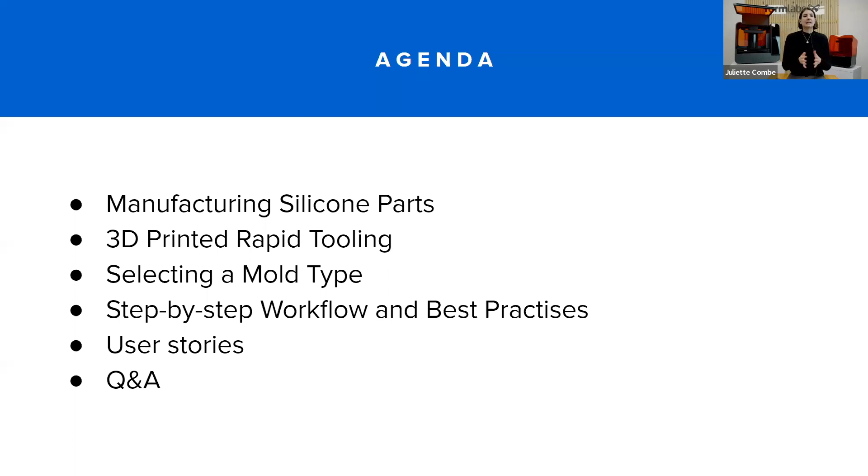Just to give a little context. So silicones are a class of polymers that contain the elements silicon and oxygen, and they transform from a gel or a liquid to a highly flexible and stretchable solid after what we could call a curing process. So they are very popular materials because they are very versatile. They have high performance properties.

Many of them actually. So first, they allow soft ergonomic geometry, but they also have very good heat resistance, electrical insulation, chemical stability, high tear strength as well, and watertight seals and so on. So they are very popular across many industries, from automotive to construction, electronics, consumer goods. So you can see those pictures on these slides. In the healthcare market also.

If you want to share what industry you are from, feel free to discuss that in the chat. Would be very curious to know what industries you are in.

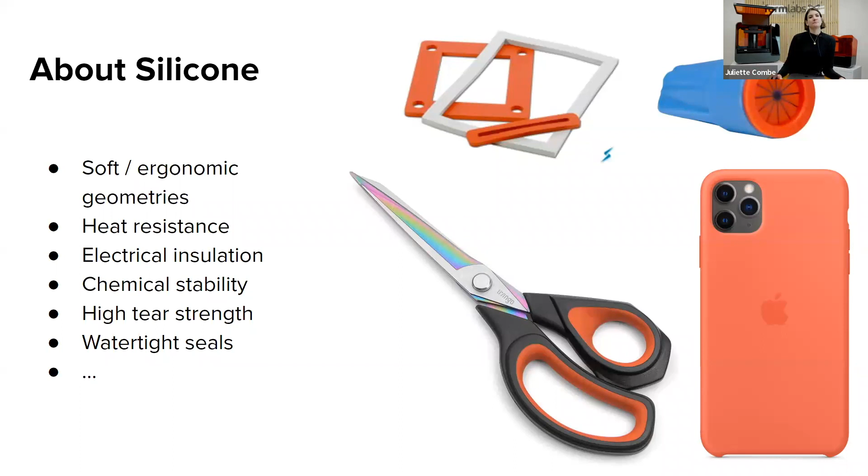And also in the entertainment industry, this is a pretty popular material as well. So just a quick slide on the Durometer scale. That is a standard for showing the different hardness of silicone. So we're going to talk about a few different silicones here. You can see it ranges from very soft material to very hard material, from soft molds to harder parts.

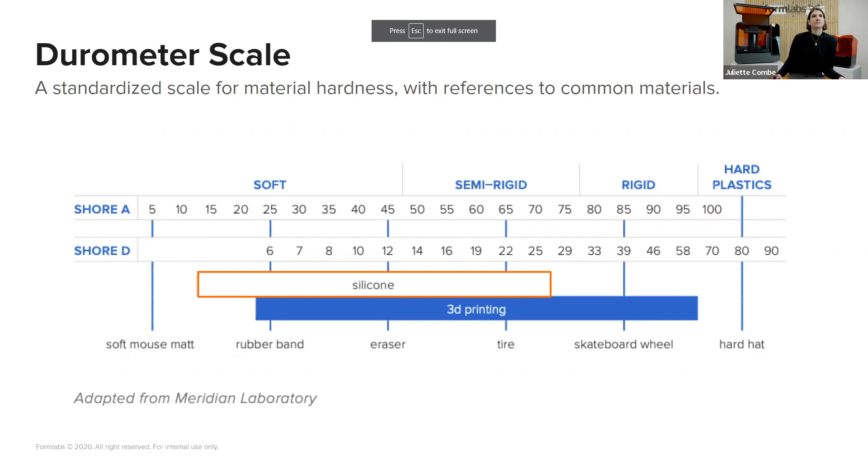So silicone elastomers dominate the market. This is what we are considering today. This is our focus, and they can be divided into three categories. First, liquid silicone rubbers, also called LSR. Those are high performance silicones, and they are usually employed for producing technical parts with very tight tolerances, and they are processed at high temperature with what we call liquid injection molding. So they are usually selected for large volume production and industrial applications. So you can see it on the left here.

Another type of silicone are high temperature vulcanized or HTV silicones. They're also sometimes called heat cured rubber, HCR. Those are usually more solid silicones, and they also have a lot of great properties in terms of temperature resistance and aging as well. So they are often used in cables and insulators. And usually they are processed with a lot of different manufacturing processes, but very often extrusion or compression molding, among many others. So you can see it on the right.

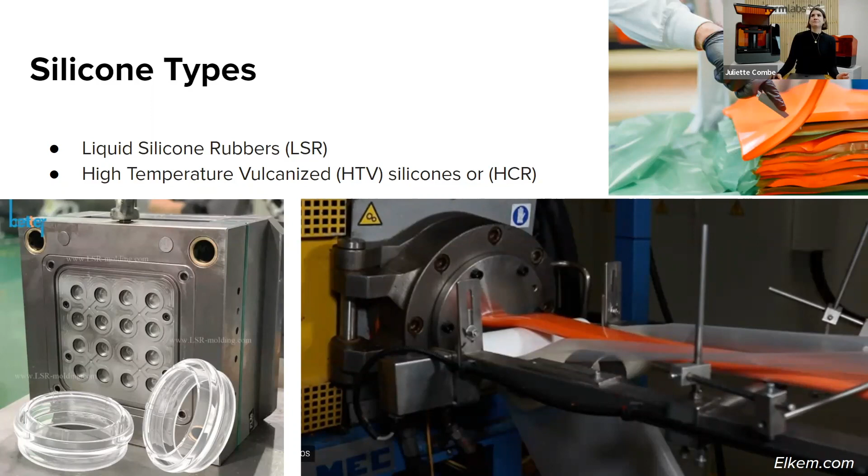And a third type of silicone elastomer is room temperature vulcanized silicone, RTV. This is what we're going to focus on today. This is basically silicone that is cured at room temperature, so there's no high heat involved. So they are relatively easier to process than the two previous silicone types, and still have great mechanical properties and thermal properties as well. They are very popular in various industries to make gaskets, medical devices, overmolded devices as well.

I saw that a lot of people were interested in overmolded devices. And it's also very common to use them in mold making, to make molds. So usually they require much longer cycle time to process and more manual labor, so they are better suited for small volume production. And they are processed also by injection molding or compression molding, different types of molding processes.

And in those types of RTV silicone, we actually consider three types: platinum catalyzed silicones that are higher cost, but also superior in terms of long-term dimensional stability and low shrinkage. Then there's tin catalyzed silicone. Those have lower cost, but are less stable over time and tend to have a higher shrinkage rate. And then there's also silicone putty, which is a two-part putty in which the components are blended together in equal volume. And those also have different types of hardness.

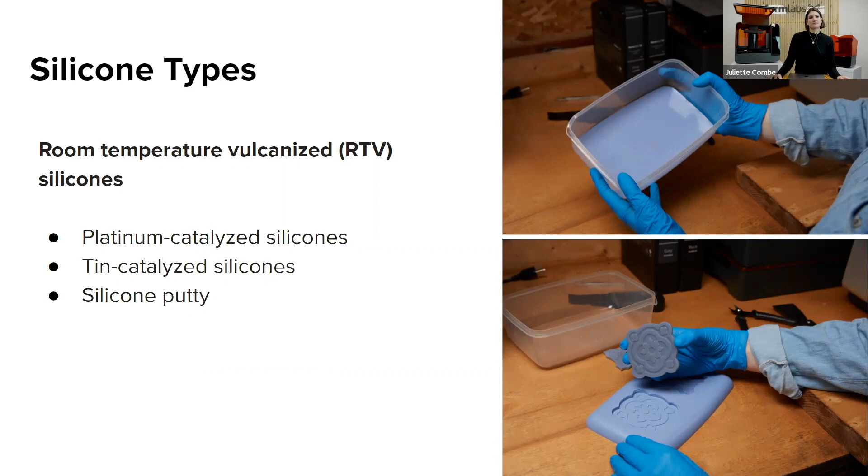All right, so now I want to discuss 3D printed rapid tooling. We actually already have a lot of content on rapid tooling in general. This is a popular topic for manufacturing processes. And so if you're interested to learn more about what rapid tooling is, we have a page on our website, and we also have a white paper about that. So this is an interesting resource to understand what rapid tooling is. But I'm just going to recap here what it is.

So as I mentioned before, common silicone processing techniques can be injection molding, compression molding, extrusion, resin transfer molding as well. So you can see here illustrations of these processes. Those are traditional processes that involve some sort of tooling, either a mold or a die that will shape the silicone into the shape that you want for your parts. And usually this tooling is made out of machined metal. It can be very expensive to produce, and it can take weeks of lead time. So most of those techniques are industrial techniques used in mass production, and you cannot make a lot of modifications on your tooling, on your mold or the die.

So for prototyping, for designers that would like to prototype silicone parts, or that would like to make small series of silicone parts with the right silicone that they're going to use for production, it's actually very challenging to be able to do that with those common manufacturing techniques.

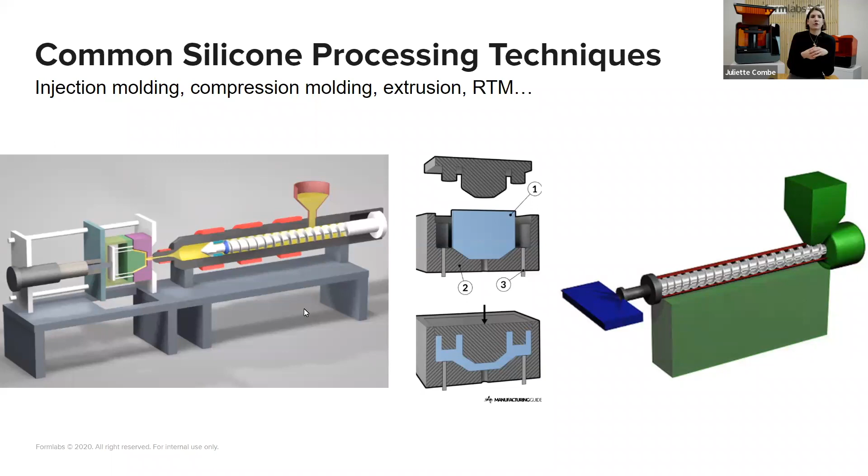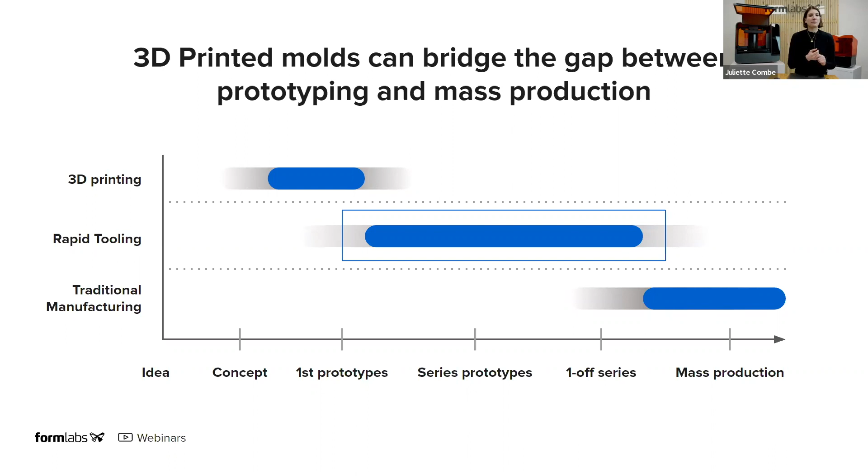All right, so now, as I introduce what is rapid tooling, I just want to give a bit of context on why 3D printing is actually enabling rapid tooling. So for those who don't know Formlabs, we are a manufacturer of professional solutions for 3D printing. So we manufacture the hardware, the 3D printing resin, and also the software.

And 3D printing is really a powerful tool to produce parts in limited quantity and to produce tools rapidly. It's because it's a tool-less fabrication process. So you get flexibility and agility to change your design. You also have design freedom, so you can have molds that have different types of complexity.

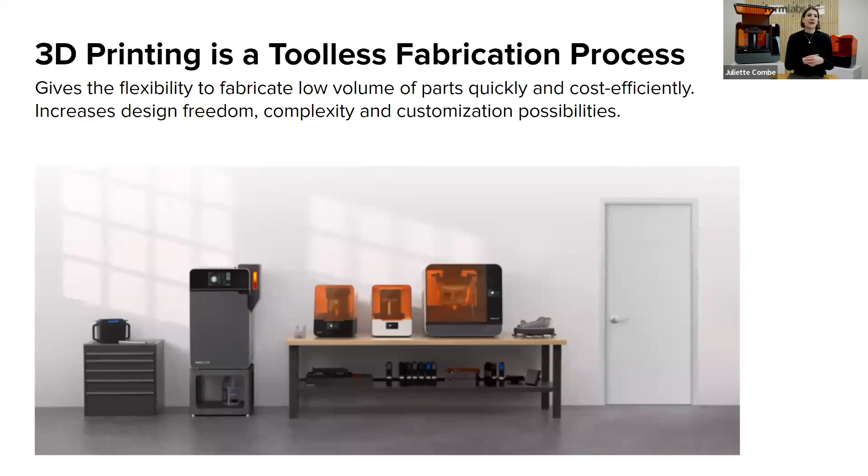And so at Formlabs, we have two 3D printing technologies. The one we recommend for molding, for silicone molding, will be SLA. That stands for stereolithography. You can see here a picture of the Form 3 printer. It's a resin-based process. And those printers are very easy to implement, operate, maintain, and come with a complete ecosystem.

So this is really accessible to just set up in your prototyping lab. It requires very limited equipment, so you can save time from your CNC machine or any other method that you were using to produce your mold.

And SLA, stereolithography, produces very high resolution and accuracy parts with clear details. So it's usually the one we recommend for molding, and most of our users are interested in this because it has very smooth surface finish and detailed prints. That's the main characteristic of SLA, and we also see that SLA produces very stable prints that are isotropic, and we also developed a portfolio of different types of resin that have different performance.

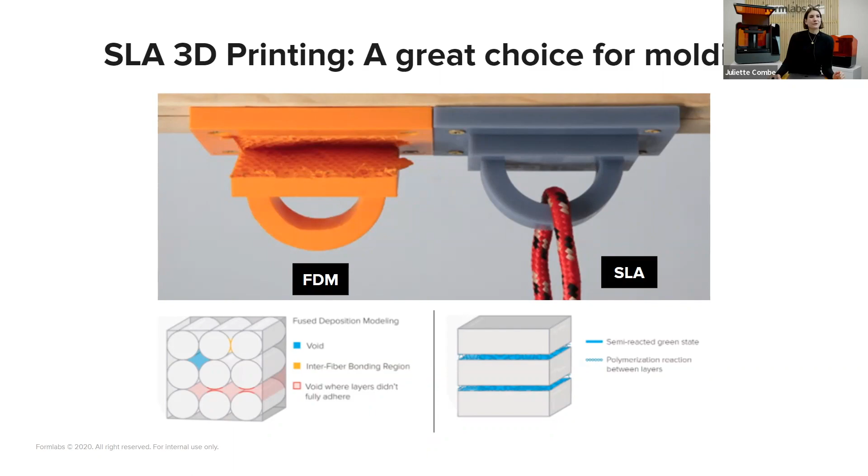Some resins are clear, and that is one of the ones used the most for silicone molding, and it is, as I mentioned, very smooth and transfers all the details of the design into your parts. All right, so that was it for the intro. Now I'm going to leave the floor to Analisa, and she's going to guide you through the workflow and recommendations for making silicone parts. Sorry.

Okay. Thank you, Juliette. You can skip ahead to the next slide because I'd like to show a table here. So 3D printed tooling using SLA 3D printing really opens the door to a few different types of mold configurations for forming silicone parts. And the type that you choose is really going to depend on a few different factors. That includes your target part geometry, the type of silicone that you want to use, and also how many copies of your part you want to make.

So these tooling types could either enable you to use the same mold dozens of times, or we'll go over a sacrificial type of mold called an eggshell mold, which is only used once. So the first type that's shown here is compression molding. In this particular mold type, you're squeezing a fast curing silicone putty into a two-part mold using a clamp.

One thing to note is that, of course, it's always important to do draft analysis on a mold design. This particular type of mold is not very friendly to undercuts or sharp angles. So it's really important to consider how those mold bodies go together and come apart during compression. This mold can be used dozens of times before it fails.

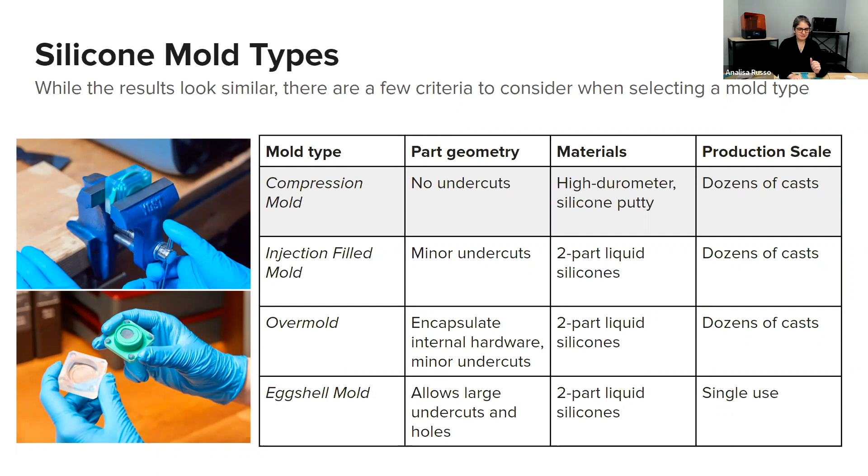The second mold type we'll cover is injection filled molds, which are used with a two-part liquid silicone. So in this type of mold, you're injecting liquid silicone through an inlet and then allowing air to release through air vents. When it comes to prototyping or maybe short run production, a really common configuration for this is to use gravity to assist the filling process.

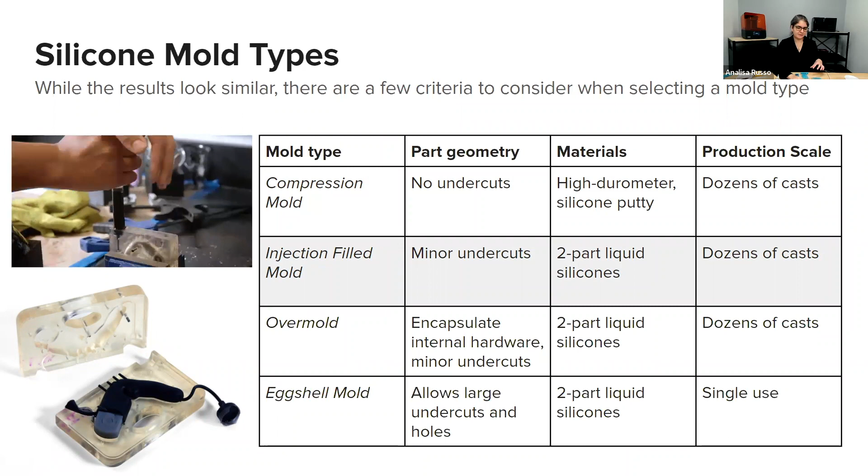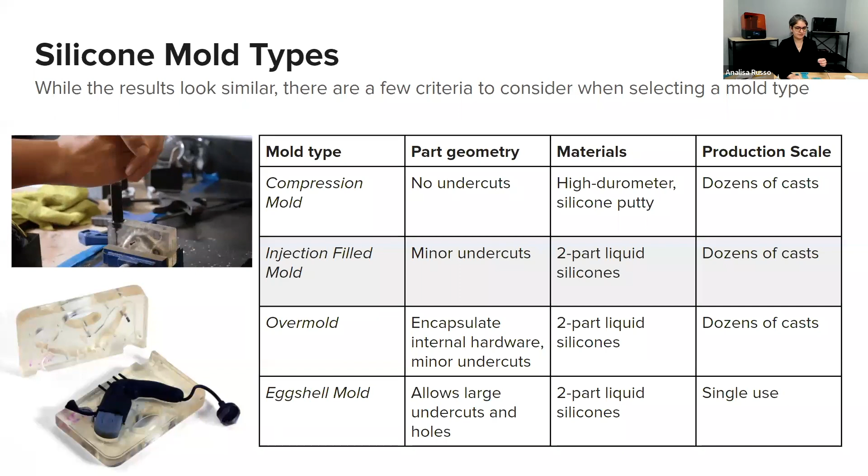And that's actually what's shown in the animation here. So basically you're filling or injecting the silicone through a port in the top of the mold. That silicone snakes around to the bottom of the mold cavity. And then you have air vents again at the top of the mold.